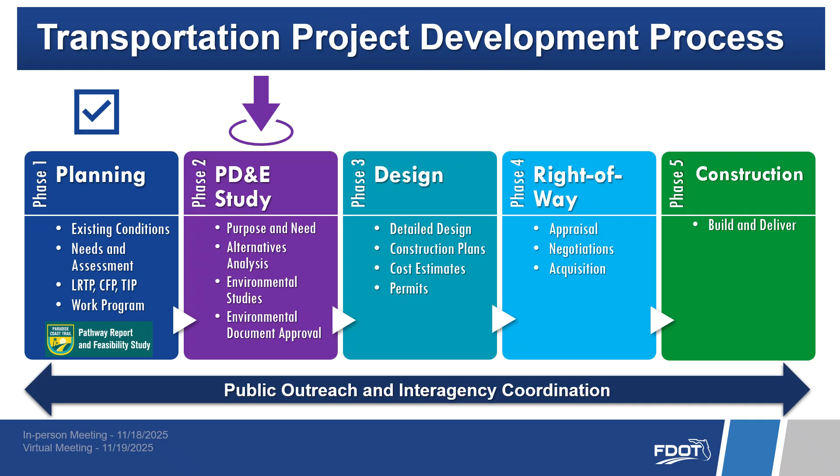The purpose of this PD&E study is to evaluate engineering and environmental data and document information that will aid Collier County, FDOT District 1, and the FDOT Office of Environmental Management in determining the type, preliminary design, and location of the proposed improvements. The purpose of this public meeting is to provide you the opportunity to ask questions and express your views concerning the proposed alternatives under consideration.

FDOT is also asking local governments and regulatory agencies to provide comments about the project. In this presentation, we will introduce the project, discuss the purpose and need, identify the study alternatives, and explain the PD&E study process.

The study begins at Radio Road and extends approximately 11.5 miles to the Collier County line. The proposed project will connect to the existing Rich King Memorial Greenway, the North Collier Regional Park, and to the proposed Bonita Estero Rail Trail, BERT, to the north. The project corridor traverses 6 major arterials and 2 bridge crossings at the Golden Gate Canal and the Cocohatchee Canal.

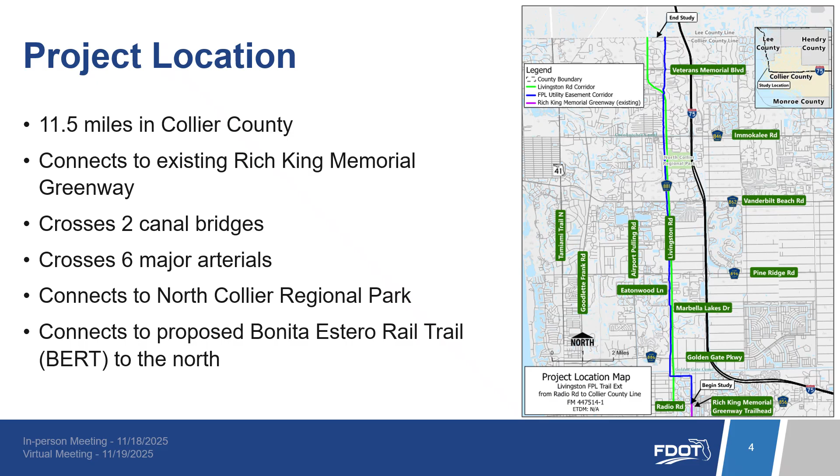The Livingston FPL Trail Extension PD&E study proposes an important non-motorized shared-use path along the Livingston Road and FPL Utility Easement Corridor in Collier County, Florida. This project will support the development of the shared-use, non-motorized SUN trail network in Collier County. The Livingston FPL Trail Extension will not only improve connectivity for pedestrians and cyclists, but it will also enhance safety conditions in the area by providing a separated shared-use path.

The need for the proposed improvements for the Livingston FPL Trail Extension PD&E study is identified in project status with funding in the Transportation Improvement Program, TIP, and Statewide Transportation Improvement Program, STIP. The project will improve system linkage by providing a vital connection in the Florida SUN Trail Network and Florida Gulf Coast Trail. The project will fill the gap connecting the existing Rich King Memorial Greenway, located south of Radio Road, to the proposed Bonita Estero Rail Trail, BERT, SUN Trail in Lee County, creating an expanded trail network that will provide convenient and safe public access to residential, recreational, and employment destinations.

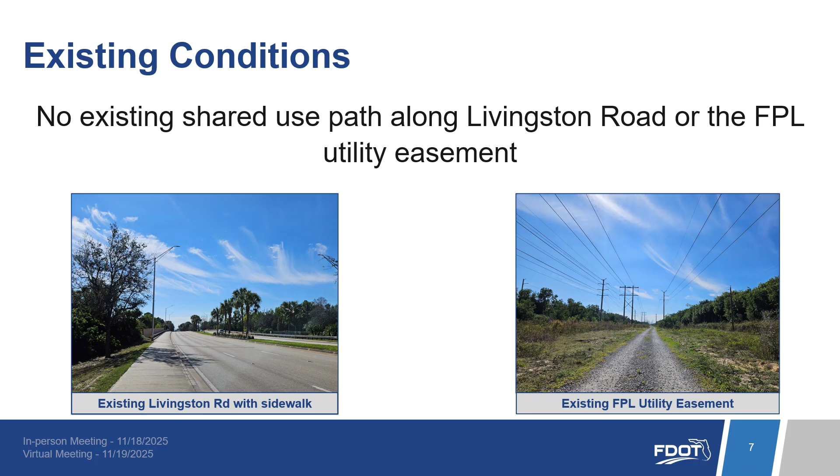There are 2 existing Livingston Road bridges within the study corridor. The first bridge spans the Golden Gate Canal with a length of 166 feet and a width of 104 feet and 7 inches. The bridge accommodates 3 travel lanes in each direction, sidewalks on both sides with a divided raised median.

The second bridge spans the Cocohatchee Canal with a length of 94 feet and a width of 148 feet and 5.5 inches. The bridge accommodates 3 northbound lanes, 1 southbound right turn lane, 3 southbound through lanes, 2 southbound left turn lanes, an 8.5-foot traffic separator, and 4-foot bike lanes and sidewalks on both sides.

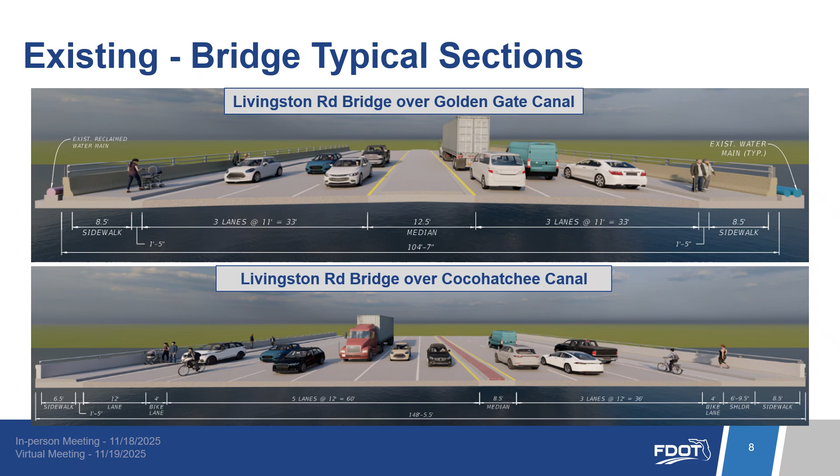Alternative 1 proposes constructing a new 12-foot wide shared-use path with a 4.5-foot separation from the roadway, from the back of curb, and a 4-foot buffer area behind the path. The alignment for Build Alternative 1 is parallel to the west side of Livingston Road for the entire 11.5 miles of study corridor. Right-of-way needs for Alternative 1 vary along the corridor due to existing right-of-way widths and existing easement agreements.

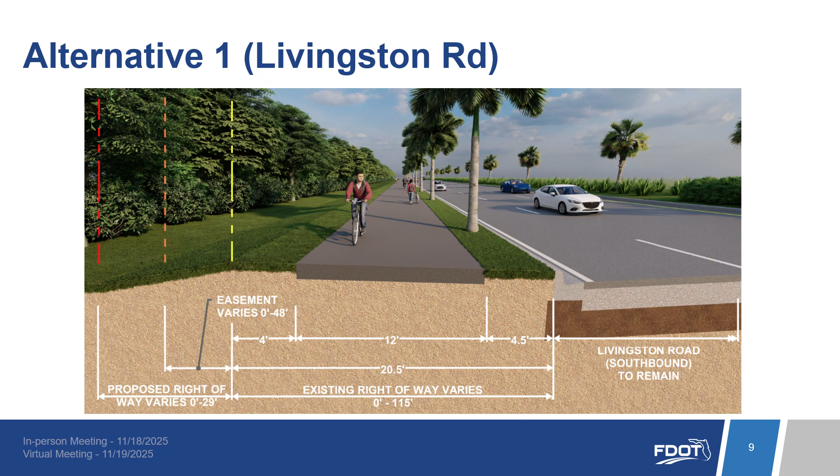The existing bridge over the Golden Gate Canal can be modified to accommodate the proposed shared-use path on the west side of Livingston Road for Alternative 1 without any bridge widening. Option A proposes a single slope barrier with a double bullet railing, a shift of the southbound lanes, and a reduction in median width. Option B proposes channelization fencing, a shift of the southbound lanes, and a reduction in median width.

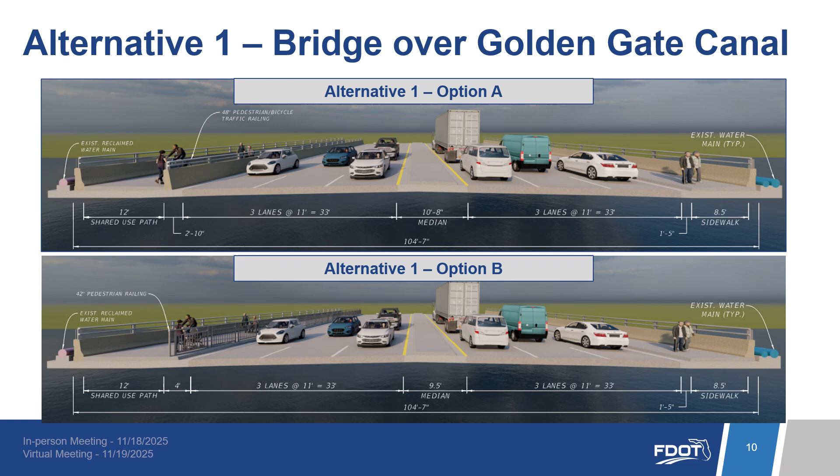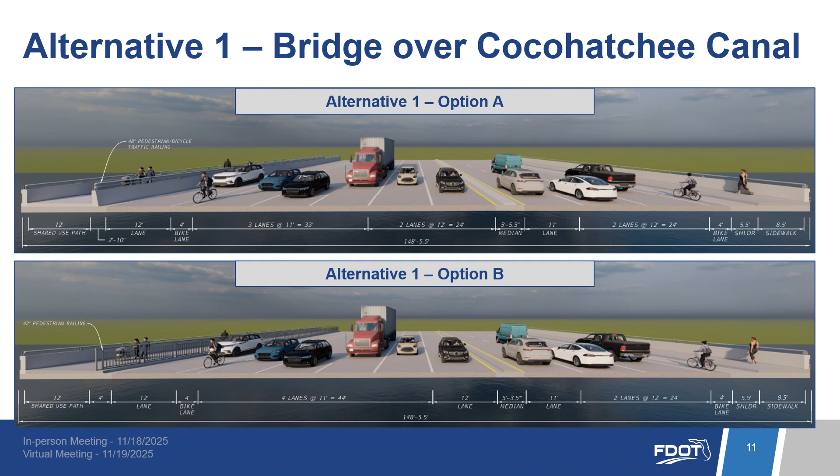The existing bridge over the Cocohatchee Canal can be modified to accommodate the proposed shared-use path on the west side of Livingston Road for Alternative 1 without any bridge widening. Option A proposes a single slope barrier with a double bullet railing, a shift in the northbound and southbound lanes, and a reduction in traffic separator width. Option B proposes channelization fencing, a shift in the northbound and southbound lanes, and a reduction in traffic separator width.

Alternative 1 will require the existing west sidewalk on Livingston Road to be removed and replaced with the proposed 12-foot wide shared-use path. This alternative will also require the relocation of overhead distribution lines, lighting, and some landscaping. Build Alternative 1 utilizes existing roadway drainage and can be accommodated on the existing canal bridge structures with some modifications, but no additional bridge widening.

The alignment of Alternative 1 accommodates 2 optional pedestrian mid-block crossings that provide trail connectivity to the North Collier Regional Park and the Livingston Park and Ride Lot north of Immokalee Road.

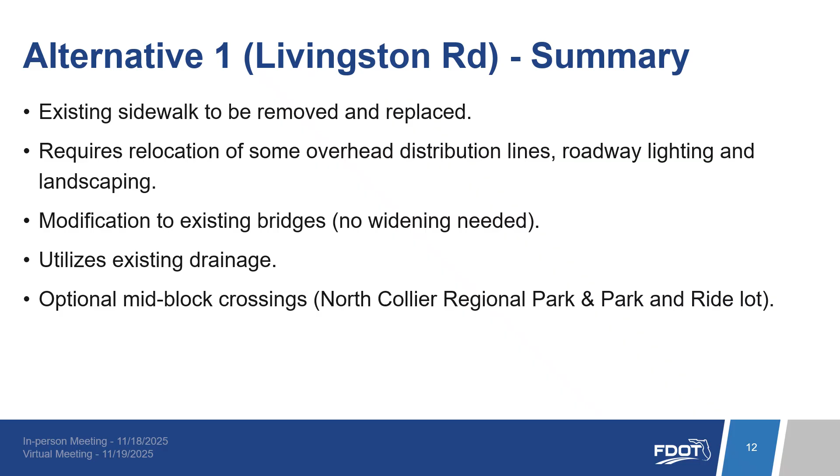Alternative 2 proposes a 12-foot wide shared-use path with minimum 4-foot buffers on both sides within the FPL utility easement along the 11.5 miles of the study corridor. The alignment for Build Alternative 2 follows the existing gravel maintenance road within the FPL utility easement. Right-of-way needs for this alternative vary along the corridor and will be refined in the design phase.

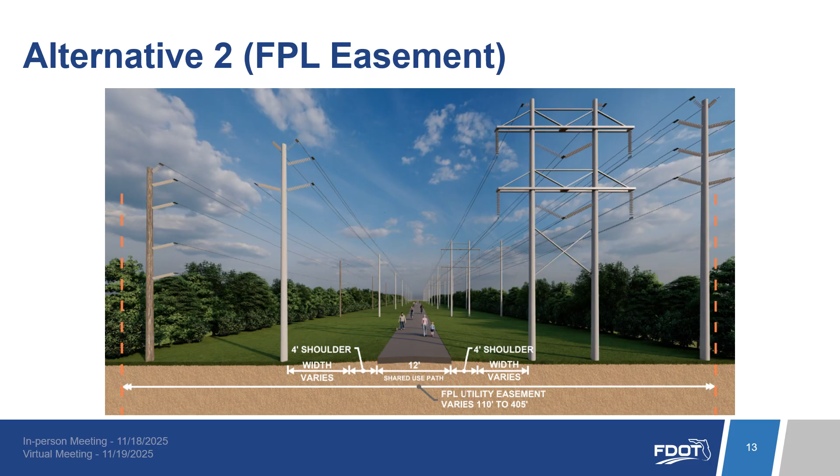2 new pedestrian bridges are proposed with Alternative 2 over the Golden Gate Canal and Cocohatchee Canal. The two pedestrian bridges are both proposed to be 16 feet in width to accommodate the 12-foot shared use path with 2-foot buffers on each side.

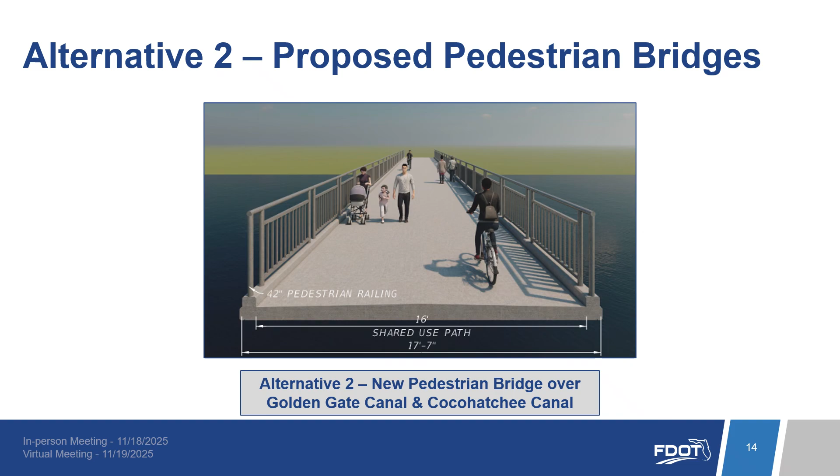The alignment for Build Alternative 2 does require 4 pedestrian mid-block crossings at Tivoli Lane, Livingston Road south of the Golden Gate Canal Bridge, Livingston Road south of the intersection of Entrada Avenue, and on Veterans Memorial Boulevard east of Livingston Road. The two optional pedestrian mid-block crossings that can be provided with Build Alternative 1 can also be provided with Build Alternative 2 at North Collier Regional Park and the Livingston Park and Ride Lot north of Immokalee Road.

This alternative proposes 2 new 16-foot wide pedestrian bridges over the Golden Gate Canal and the Cocohatchee Canal. For drainage purposes, the trail will need to be elevated with fill material to provide vertical clearance for cross drains and to maintain drainage flow within the utility easement.

Alternative 2 provides larger separation from Livingston Road and allows for the west sidewalk along Livingston Road to remain. Build Alternative 2 will require a consent agreement from FPL during the design phase, similar to the existing Rich King Memorial Greenway to the south.

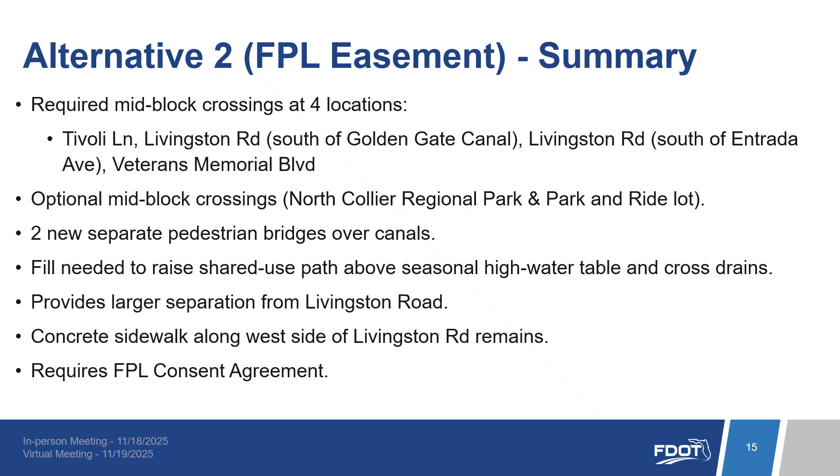Throughout this study, a no-build alternative is also considered. The no-build alternative assumes that no improvements are made to accommodate a new shared-use path within the Livingston Road and FPL utility easement corridor through the year 2050. Not building a new shared-use path would reduce costs and minimize property or environmental impacts, but it would also limit safe and connected options for people walking and biking.

This PD&E study is ongoing. Project team members will continue to develop, refine, and evaluate alignment alternatives for the Livingston FPL Trail extension throughout the remainder of the study. Potential environmental effects associated with the proposed build alternatives are under careful evaluation and include detailed studies of protected species and habitat, wetlands and floodplains, water quality, stormwater management and permitting, Section 4(f) recreational sites, right-of-way requirements, contamination, archaeological and historical resources.

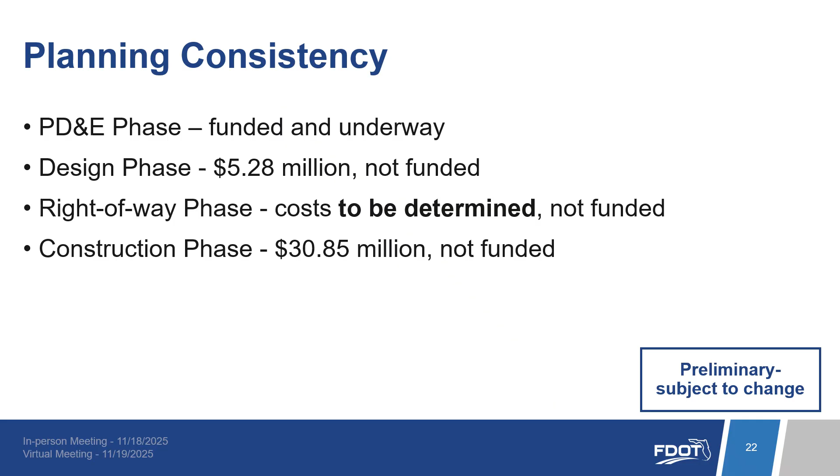The Livingston FPL Trail Study Team is here tonight to answer your questions and discuss the project. We invite you to ask them your questions and to review all the aerial maps, plans, and illustrations. This PD&E study is being conducted and completed according to the requirements of the National Environmental Policy Act and other related federal and state laws, rules, and regulations, which will qualify future phases of this project for federal funding. For additional information on all rules and regulations this meeting follows, please see the Federal and State Requirements Board.

Thank you for your interest in the proposed Livingston FPL Trail improvements and for taking time to participate in this public meeting. We look forward to your comments and your continued involvement in this important PD&E study.

And finally, an FDOT safety moment. Distracted driving is one of the fastest-growing safety issues on the roads today. Distracted drivers aren't just a threat to themselves, they're a danger to everyone else on the road. Texting, which includes messaging, is considered the most dangerous type of distracted driving because it combines visual, manual, and cognitive distraction. FDOT thanks you for making safety a continued priority.